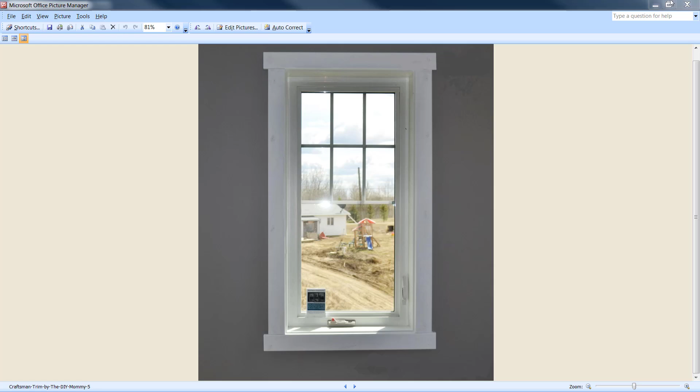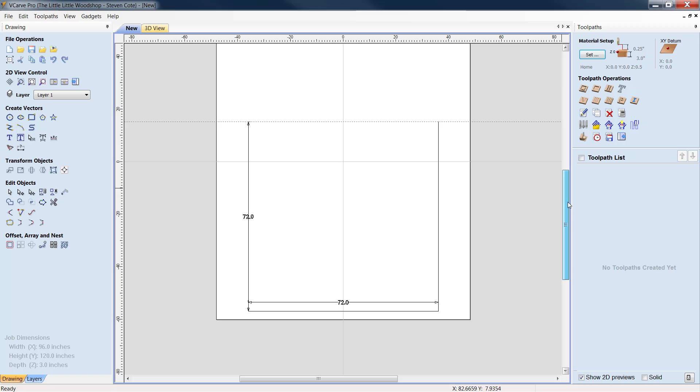Okay, without further ado, let's bring up our CAD file now. For the sake of this example, I've already marked this up a little bit. As we can see, we've got 72 inches wide, and we've got 72 inches high. Now, I'm going to show you 2 ways to figure this.

What I'm doing here is I'm basically building a schematic of the arch-styled window, and from there we'll trim it out, all right? Well, because it is perfectly circular, what we could do...

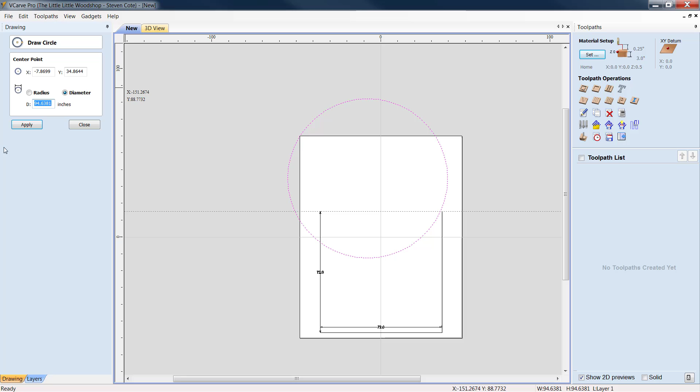Is we could go in and draw a circle, okay? And we could take that circle and set it to 72.0 inches, and click apply. Now let's close this window out. Let's get this item, we'll hit transform objects. We need to align it in the center.

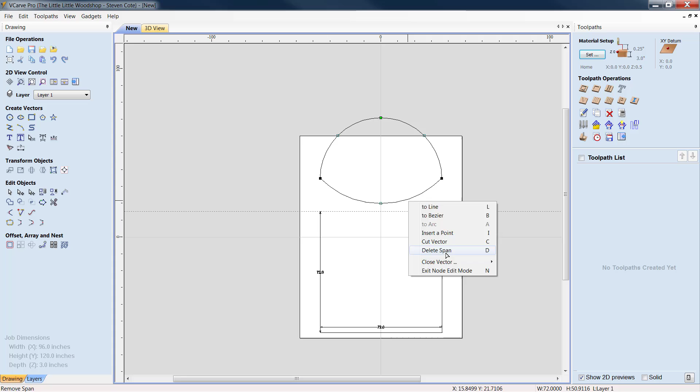What I'm going to do now is come over to node editing, and we're going to right click and delete the point. Then we're going to right click and delete the span. What we're left with is literally half of the arch. Pretty simple, I told you guys this was not going to be a big deal.

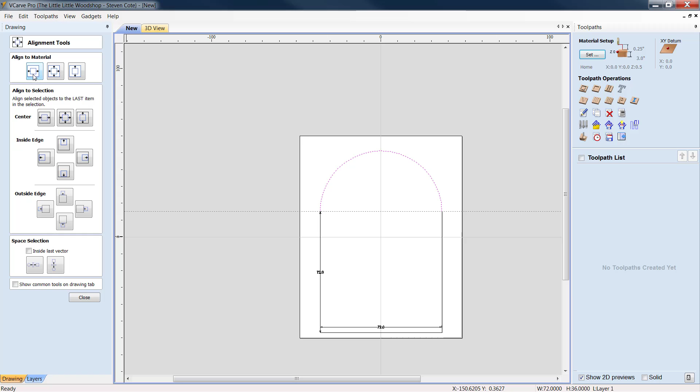Let's highlight him, and then let's roll him down in. Because basically what I'm looking to do here is align him one last time. All I'm going to do is highlight the whole shooting match.

I'm going to come down to Join Open Vectors, and then click Join. We've now created that whole archway. I know that from the top, I ended up putting a guideline in here exactly at 72 inches where my arrow went. You see the guideline going across, so that from here to the top of my arch is 36 inches, creating a perfectly circular arch.

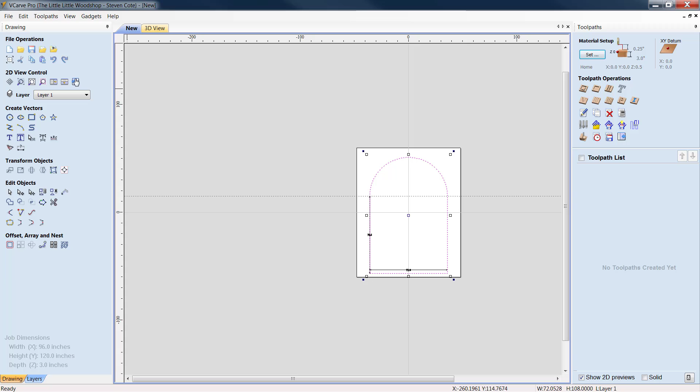All right, well, let's set him aside for a moment. Actually, we need to go back. All right, let's just set him aside for one second.

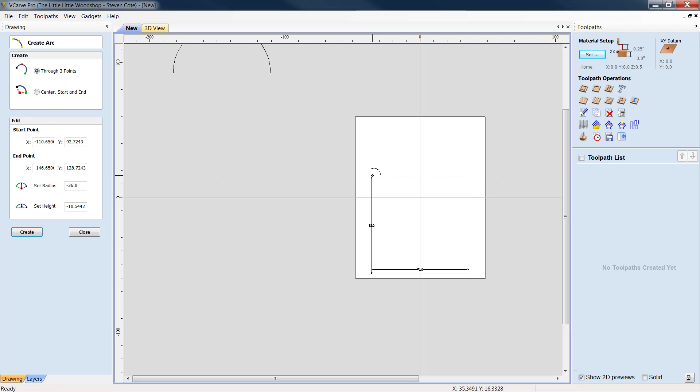The other thing you can do is come up to Draw an Arc. Now we're going to use the 3-point method, and I am going to drop it as close to dead center here as possible. All right, I'm going to zoom out, and I'm going to zoom back in. Now I'm going to try to land this just as smack dab close on the top of this as I can.

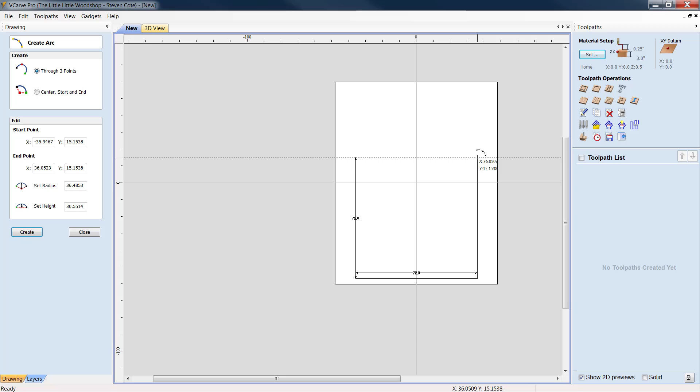All right, now with that done, if you watch over to the left hand side of the screen, you see start point, end point, set radius. Oh, we don't want the radius upside down though, that's for sure. Now we want to work him until... all right, I have him at 35.9995. I'd have to say that's pretty good for 36 inches. All right, we're going to click right there.

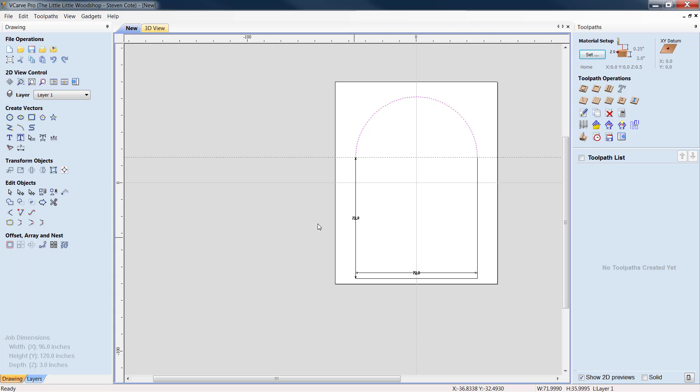Now, let's pretend for a minute that this was not a perfectly circular arch. This is the second way of doing this. Let's say for one minute, we're going to close this. We're going to take this arch and hit delete, okay? We're going to take the arc tool again, draw an arc, and stick to the 3 points functionality here. We come down, we drop him in again. Now let's say you're doing an elliptical.

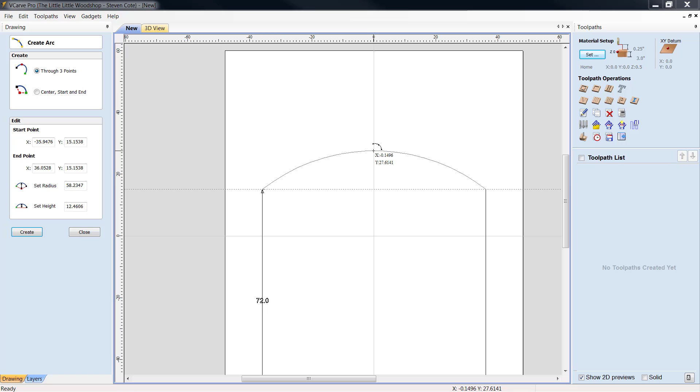Now with the elliptical, this is where this tool comes in handy. I'm going to try not to confuse anybody too bad. Depending on what your height is, pay attention to your set height right here. We're going to say it's an elliptical arch, and it's a light arch, not real high. So let's say that it's 12 inches. Well, before you sit here and pull your hair out trying to get it just right, come down, highlight the box. Well, better yet, we'll say that it's 15.

All right, we click apply. Everything is readjusted. You would find the maximum center height on your elliptical, enter your dimension here using the 3-point configuration on the Create Arc tool, and kapow. Get it as close as you can, but then come down here and set your exact height, okay? This tool is really handy for doing this sort of stuff, all right? I can't stress that enough.

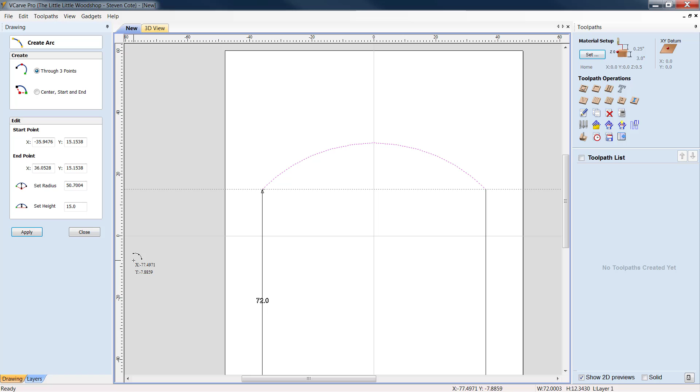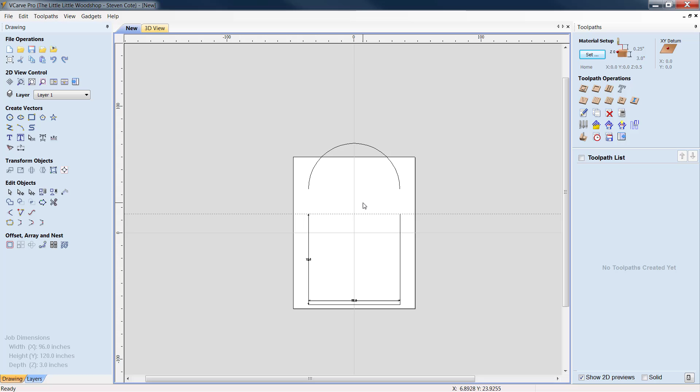But now that we know how to do this, what we're going to do is back out of some of this, get rid of some of this, and get the rest of this in here. All right, what we're going to do is reattach this real quick, and then we'll go and start doing the trim, okay? All right, everybody hang on just one second, and I'll be right with you.

All right, everybody, I wasn't going to make you sit while I reattach the radius on top of the box and blah, blah, blah, okay? Next thing we're going to do is bring up our calculator. Now, there's also a reason for me putting this guideline in, because this guideline is exactly where the radius ends and the box begins, okay? What we're going to do, oh, where'd my calculator go?

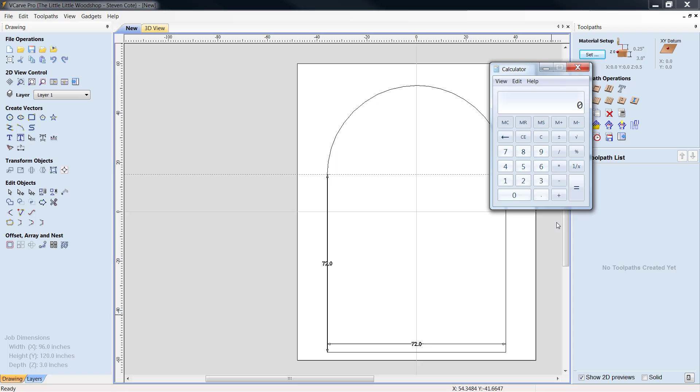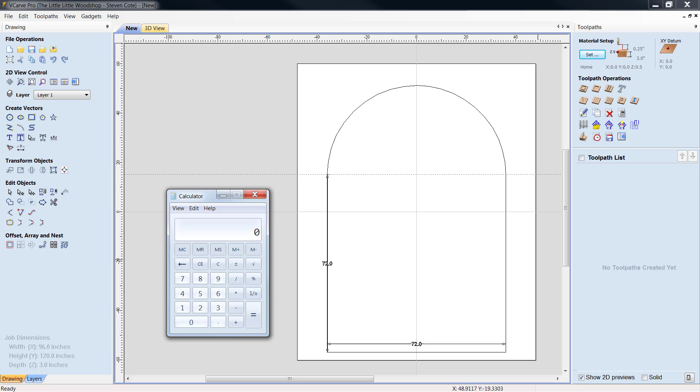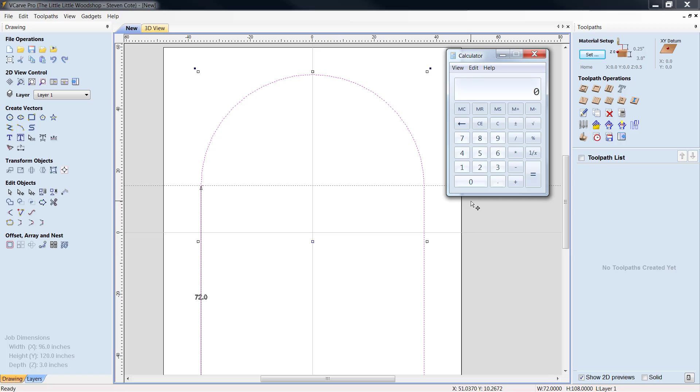With our trusty calculator, we're going to take the width of our project, which we know is 72 inches. That's the width of the window. Now we're going to put a reveal on the outer edge of those two side jambs, all the way around the window, and give it 5/16 inch.

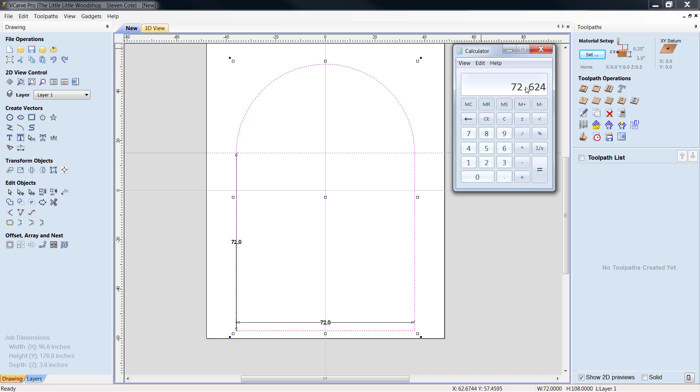We need to add that to each side. 5/16 is an additional .312 plus 0.312, which should equal 72.624. Okay, so let's take this item highlighted now.

We're going to right click, copy, right click, and paste this. Now pull up your transform object box, set selected object size. This is why I keep a calculator handy, because I never remember this. 72.624. Make sure your link X and Y is unchecked.

Okay, we're going to go 72.624, and we're going to do the same thing down here. We're going to add a 5/16 inch reveal all the way around the window. Alright, we're going to click apply.

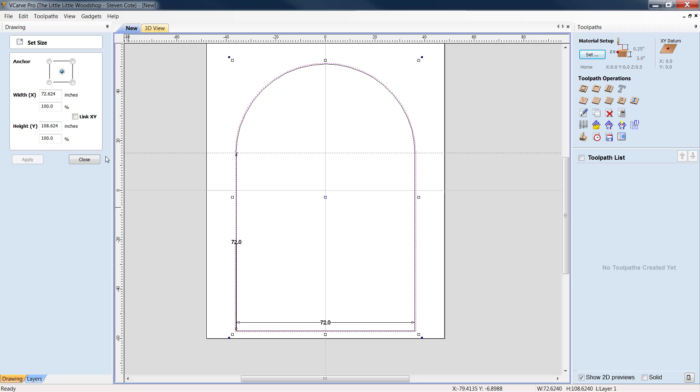Now I know you can't see it all that well, but there will be a nice light reveal on that trim. Now let's bring up Mr. Calculator again.

Our client's going to be using 1x4, or the equivalent to a 3.5 inch wide piece. Well, that 3.5 and 3.5 is 7. So let's go plus 7, equals...

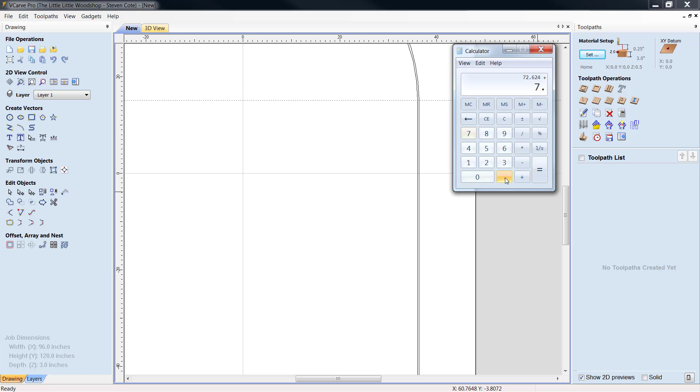79.624. So we're going to come back over here. We can highlight, we'll highlight another one again. Let's zoom out. Again, we're going to right click, copy, right click, paste.

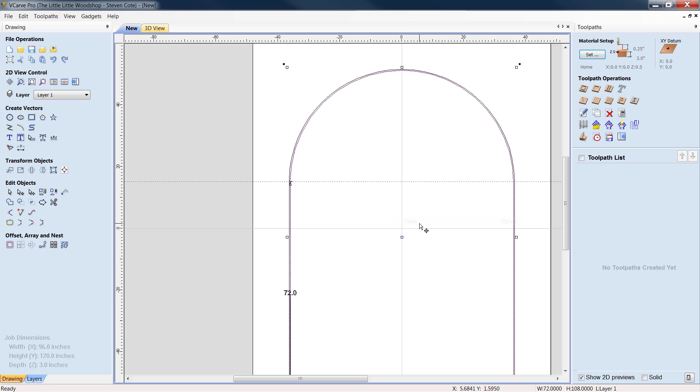Now, transform objects again. Oh, and I can't remember squat, so you have to bear with me. 79.624. Okay, so we are 79.624, and over here we will end up being 115.624. We click apply.

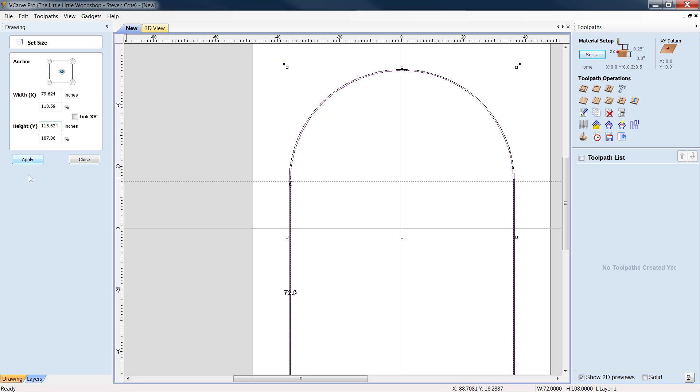Now we basically have a perfect arch constructed. Now what we need to do is, I told you in the shout out that the client, or I'll end up ripping everything down. Our bottom and our sides can be done on a table saw.

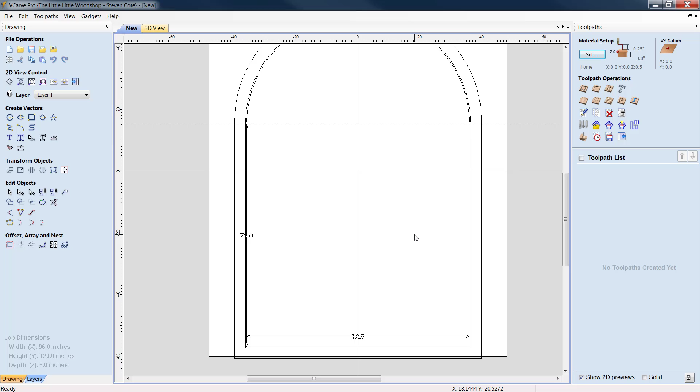Alright, now that we have our frame built, our trim work all figured, everything with our handy dandy calculator, we can shut him out. We don't need him open. What we're going to do is we're now going to do the breakpoints, because I told you I don't have a big enough machine.

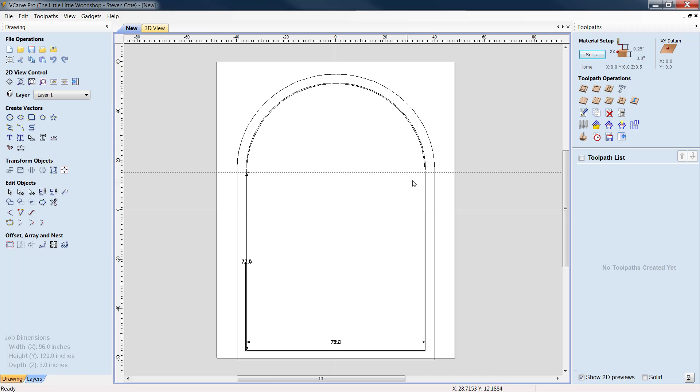Now this would be ideal to break this up and do this arch on a piece of 48 by 96. And again, we're not interested in this first interior line at all.

I basically built the model of the actual window itself, and from there I built off of that. So if you want to save yourself any confusion, you can highlight this line, right click, and delete it. Okay, this is your actual trim right here.

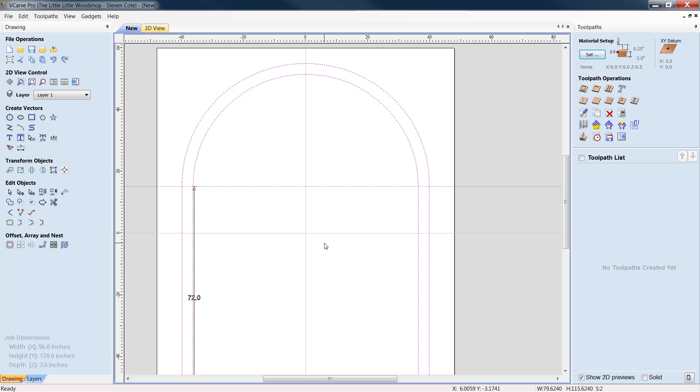Now, the other thing that we did was we left this guideline in, because this is where the top of our sides come up. I built a box, and it ends and our arch begins.

Now what we're going to do is we're going to go in here, we're going to zoom right in, and I am going to click on Edit Objects, Node Editing. I'm going to highlight this one, and what I'm going to do is come right down to the guideline right here, and right click, insert a point. I'm going to scroll over. Let me minimize.

Let me minimize some more, my goodness. Alright, I'm going to zoom in, and I'm going to do the exact same thing again.

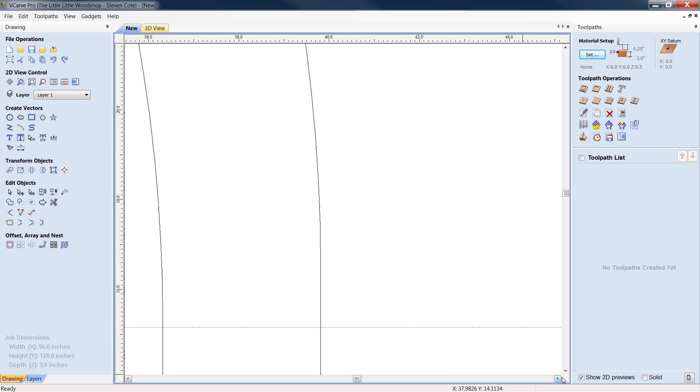Now with both of our points inserted, we're going to do this for both sides, alright. Now we've literally got all our points in through node editing. Again, edit objects, node editing function. We can see the black dot.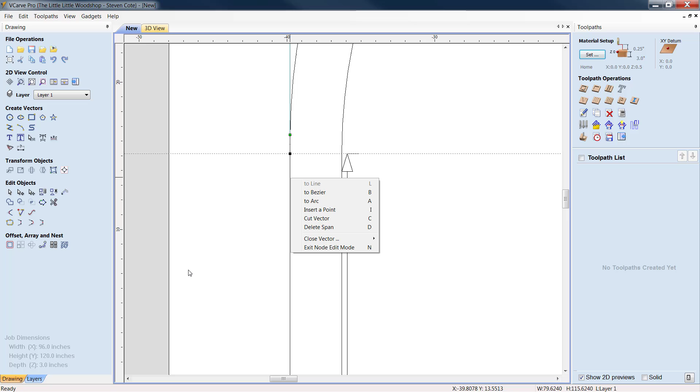What we're going to do is delete everything below the arch. We don't need it because we can do this on top of the table saw. So we're going to right click, delete span. We're going to do the same thing over here, right click and delete span.

We're going to come over here, same thing again. Right click, delete span. Right click, delete span. Now everything below here is gone. We built the base, we did our offsets with the calculator, and the arch is done.

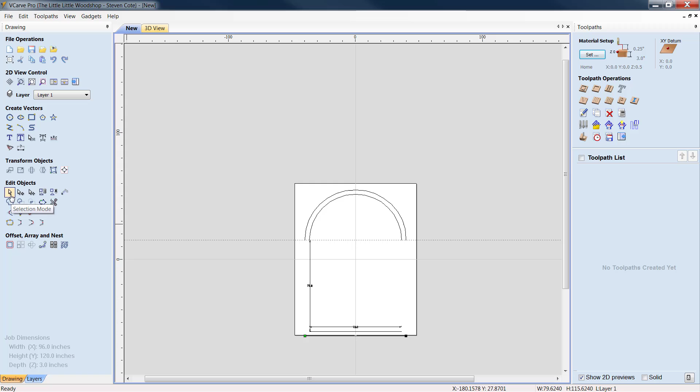Sides will get ripped. Sides and bottom will get ripped on the table saw. We'll come over to selection mode real quick, let's get rid of all the garbage, just hit delete. Now what we're going to do is also come up to the top.

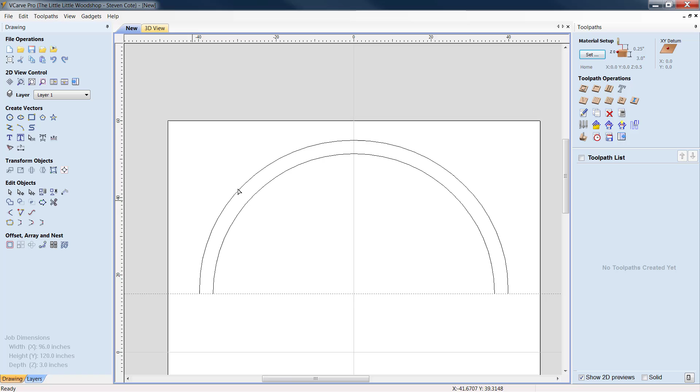We're going to zoom in. Now right dead center we've got a node, and right dead center we've got another node. I am going to take...

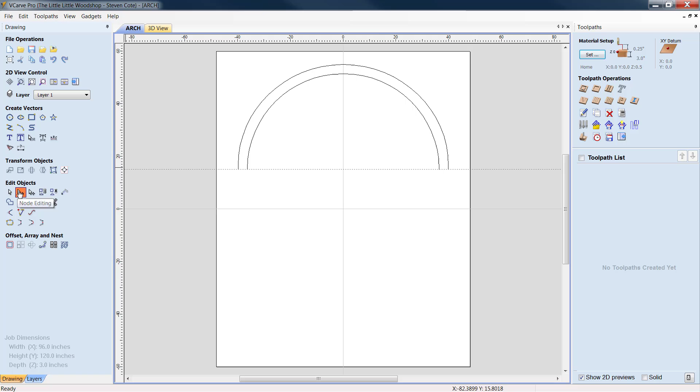What we're going to do is come in, and let's come over to edit objects again, to our node editing icon. Let's come in, I'm going to right click and delete the span on the right hand side. Let's delete span. Same thing here - from our center node, right or left, it isn't going to matter. Right click, delete span. Okay, now what we've got left...

Let me go back to edit object selection mode. I want to know what this area size is right here. So I'm going to go up just for mere reference, and I'm going to draw a box and get the measurements from it to try to calculate our material. Alright, we're 47.8 by 44.

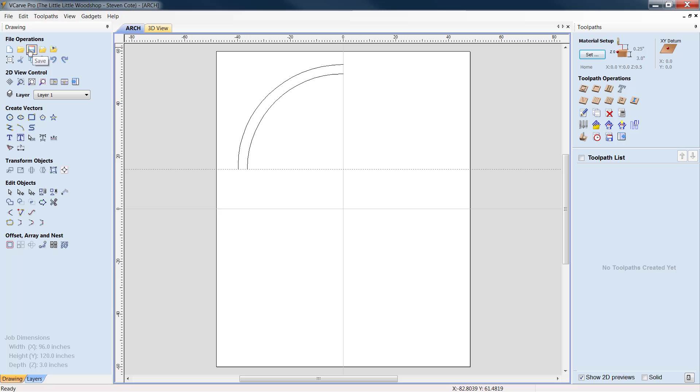So what I'm going to do is delete this box, and I'm going to come in and reset the job dimension. We're just going to call it 48 point by 48 point. Let's click apply, or click OK.

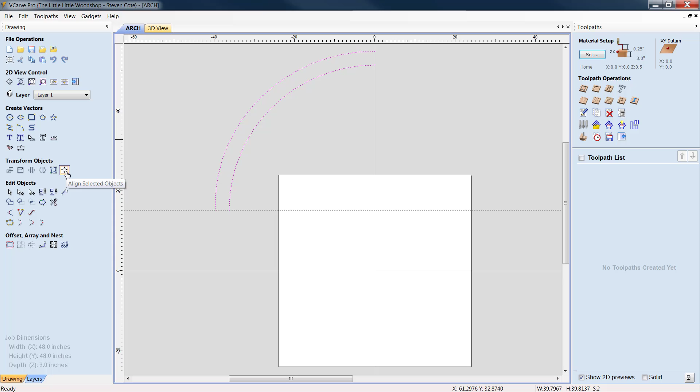Alright, we'll come back into our same selection mode. Let's highlight our box, highlight our arch rather, pull it in, pull it into dead center, and there we go.

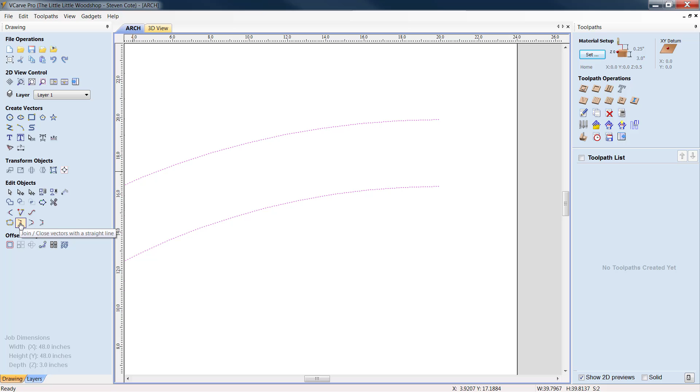Now what I'm going to do is zoom in here, and we can also right click. We can get rid of this, delete guide, we don't need all this clutter. I'm going to take and connect all my open ends with a straight line. Now the bottom that you didn't see just connected, now the upper just connected. Great, we have now got our arch made.

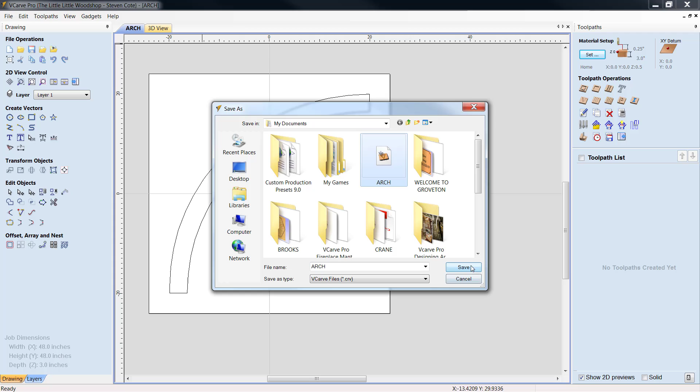Now what we're going to do is I'll go to file, and we'll just save him as... we'll save him as arch. Okay, save. Alright, now what I am going to do is I'm going to break open a fresh copy.

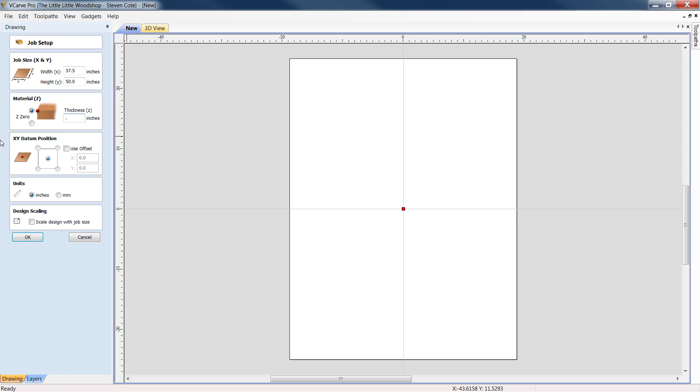We're going to set the size to what I know my machine can do. Okay, I am 50.249, I'm not worried about the 1/4 of an inch, and I know that I can go at least 37.5. It is going to be on a piece of 0.750 because we're using MDF, if you recall.

We click OK. Now what I'm going to do is, because we saved it, I'm going to import the arch. Click open. Now what we're going to do is we're going to have to rotate him. And this is going to be interesting, because we're going to end up having a big pile of scrap left. Now, what I'm going to do is click on my toolpath box over here.

I'm going to highlight him and go to Profile Toolpath. All we need to do is cut him out. So my cut depth will be...

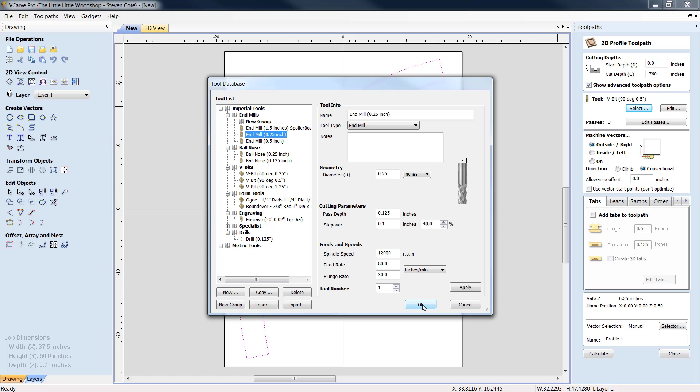0.760. We're going to select a 1/4 inch end mill. We'll use our feeds and speeds chart that we showed you in the scaling last week. This is about right, it's MDF. I could go a little faster, but I want a nice clean arch on this, so we'll keep it at 80. Click OK.

Oh, one last thing, I want to check my pass depth. Because I want them clean, I'm going to go no more than 1/8 of an inch. I could go a 1/4, but I want to make sure I take out just a little bit. I want a nice clean arch from my buddy here, who coincidentally is my client, okay?

Now we'll profile, we'll just call it arch cutout. We need to go outside. We don't need any offsets.

We do, however, need to add some tabs. We're going to edit our tabs and we'll call it 10. We'll put 10 in. Get them off the corners though, and keep them in the middle. It'll just save you a bunch of aggravation.

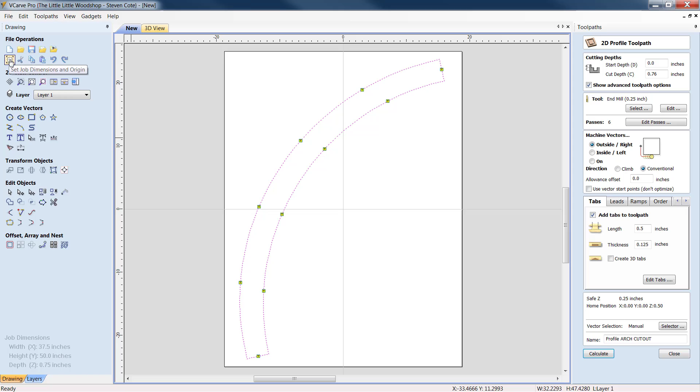All right, we can close this box out. Then what we can do is come in here and double check everything. Everything looks good. We'll be touching off of our top, our Z0 off the top of our material. I told you I always do everything from the center of the datum in our job setup. Thickness is in, datum. All right, and we're going to basically calculate our toolpaths.

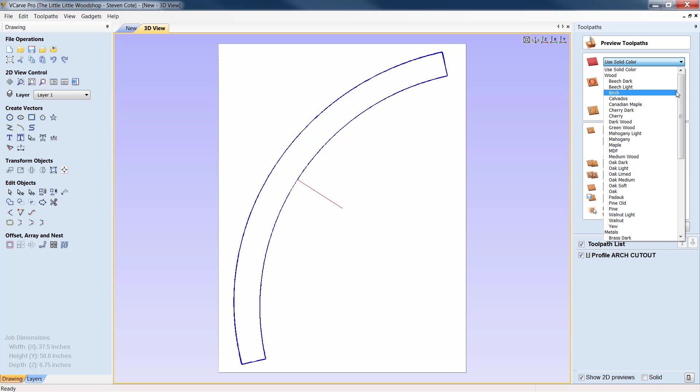Oh goodness, helps if I select them first. All right, and we could calculate. Yes, we know it's going to go 10 thousandths deeper than the material. Now let me pull up the MDF, and toolpath color, we'll obviously set it in black, and we'll just preview all toolpaths.

And what you can see is the nodes for the tab. Now what we can do is do this the exact same way and flip it, or you could take this, you can highlight it. Now you're going to basically need two pieces of material.

48 by 96, or in this case I'm going to cut this at 50. So you may end up having to buy 2 full sheets, but that's okay. The client's paying for it.

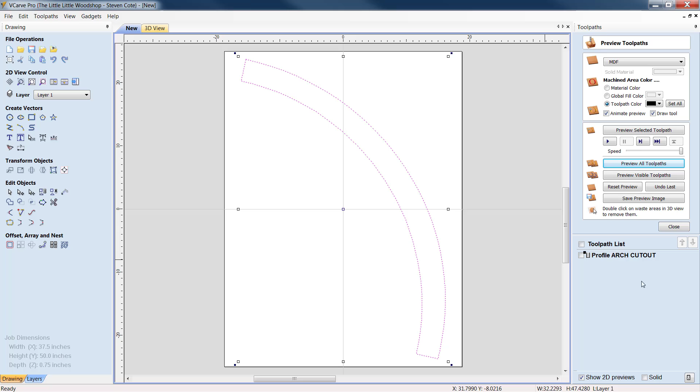I would take this one and I would mirror it to the right. I would close it, I would align my objects back to the center. And then I would go in, highlight him again, close him.

We've got all the arches, so this would be our right side. The other one would be the left. You could click calculate again. We know what's going to happen.

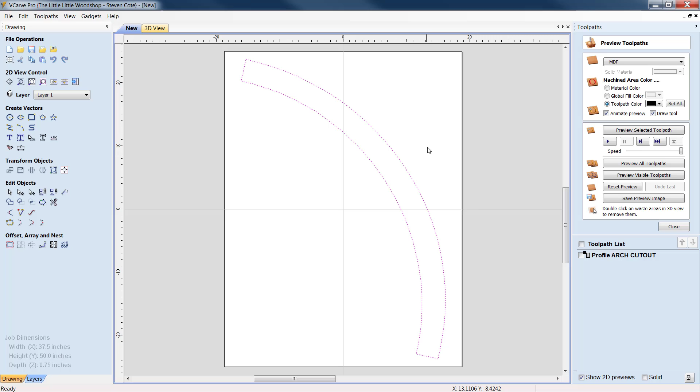Now with each toolpath, which I did neglect to tell you, okay, my apologies - before we flip him and rotate him, we would take him up here. We would go File, Save As, Arch, left side...

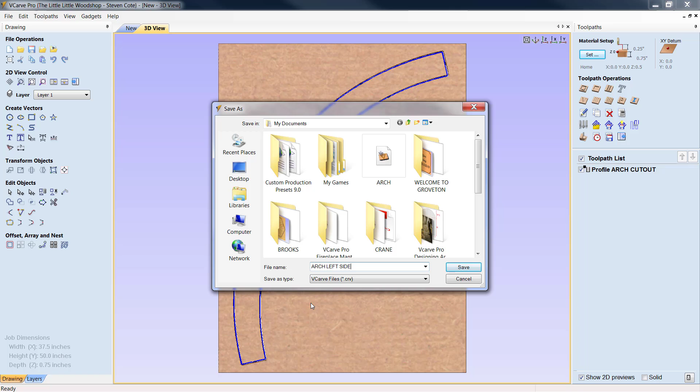Save him, and then basically let's unclick this, we'll move him over, okay, calculate, and we do the same thing again. Well, we can reset preview.

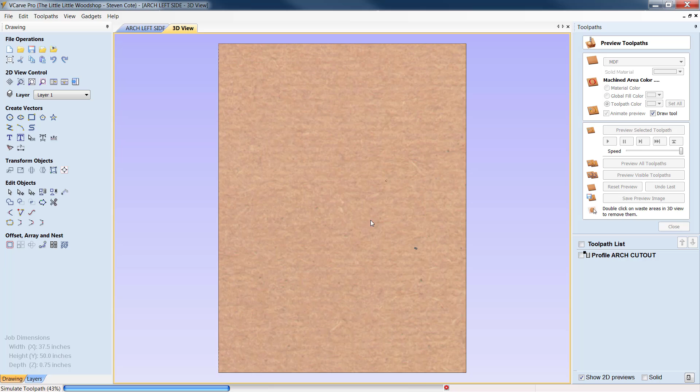We come over here again, we go Save As, Arch, right side.

And that's it, folks. That's pretty much how I would perform this and do this. It's pretty basic. The blog goes deeper into detail with the different types of arches, segmented, cathedral, and so on and so forth. There's 6 basics and a pile of derivatives off of each, okay? But for the sake of this perfectly circular arch, I hope this helped.